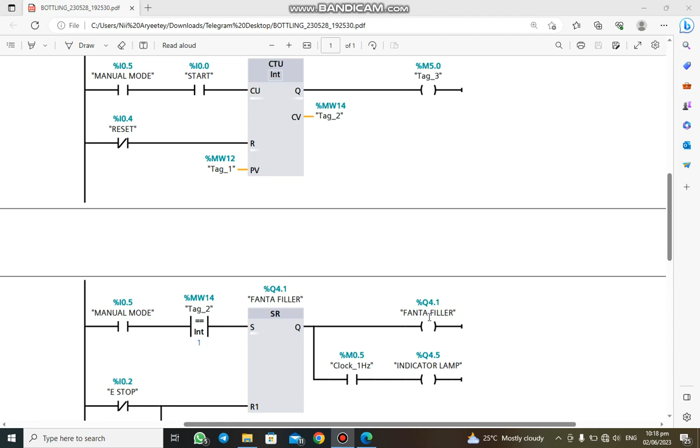So this statement is that when this current value here is 1, and then we compare it with this number, this value, which is 1, it sets our output to be high, which turns this filler on. So this filler will be filling the bottle with Fanta, and at the same time that it's filling the Fanta, this indicator lamp will be blinking.

Okay, also don't forget about this side. We have something here. Okay, so I don't know if you guys can see it very well. So something is happening right here. This manual mode again here is to help us know that we are in the manual mode. It's to make sure that we are in the manual mode.

So this MW14 is the same one here, and this number 1 is the same thing here. So basically what we're trying to achieve here is that whenever the start button is pressed, this MW is the current value of the counter. If the current value of the counter is 1, and we compare it with this number, which is also 1, that makes it true. The very moment that this one is set to high, which makes this Fanta filler start filling the bottle, at that very same time this statement here is true, which will also turn on this timer.

So this is an on delay timer. This side is the preset time, this side is the elapsed time, and this is the output of the timer. So while this one is being turned on, at that very same time this timer is being turned on, and this timer is counting for 5 seconds. And we've stored the output of this timer into the memory bit M5.1.

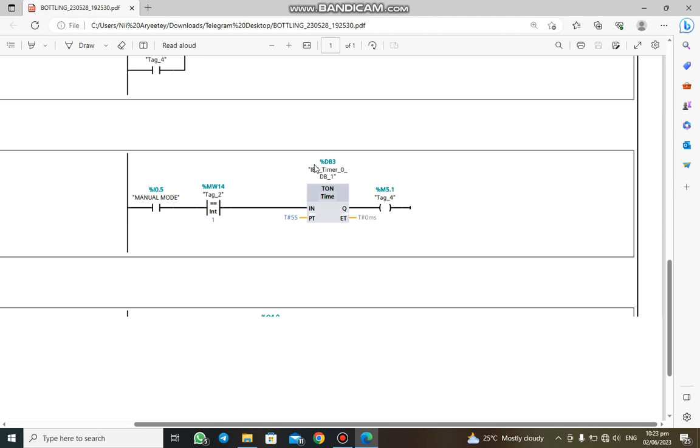Okay, so this is where the code got to. Yeah, so it's set for us to complete the code. So let me do a quick recap. Sorry, my machine is running a little bit slow.

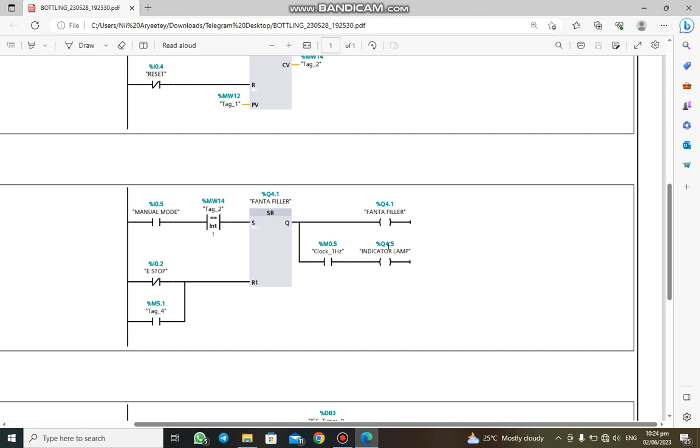Okay, so when we are in the manual mode here, we press the start button. This count value will change from 0 to 1, and when it changes from 0 to 1, this statement becomes true, which turns the Fanta filler on. Okay, at the same time too, this lamp will be blinking. Okay, so forget about this side. We come here, the manual mode is on.

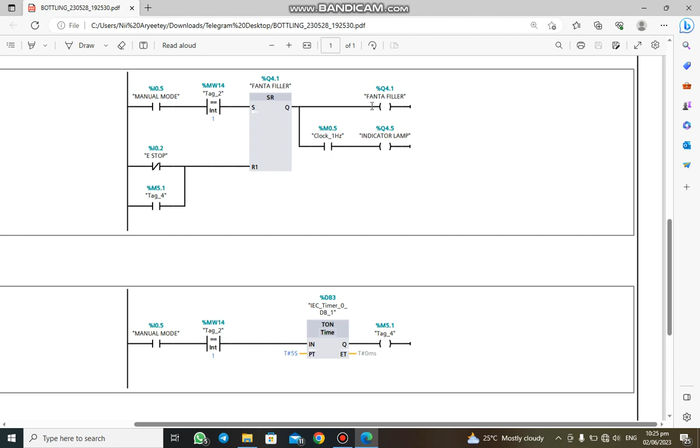This statement is true, which is same as this one. So while this Fanta filler is turned on and it's filling the bottle, at that very same time too, this output is high, which turns this timer on for 5 seconds. So after 5 seconds, this output becomes high, which we then use to reset the Fanta filler, which stops the output from filling the bottle.

Okay, so after stopping filling the bottle, we will want to press the button for the second time, which is this side. So we are in the manual mode again. The button is pressed for the second time, which then turns on the conveyor to make the conveyor start moving, which would in turn move the bottle to the second part. So then we want to stop the conveyor again. So we press the button for the third time, which is this side.

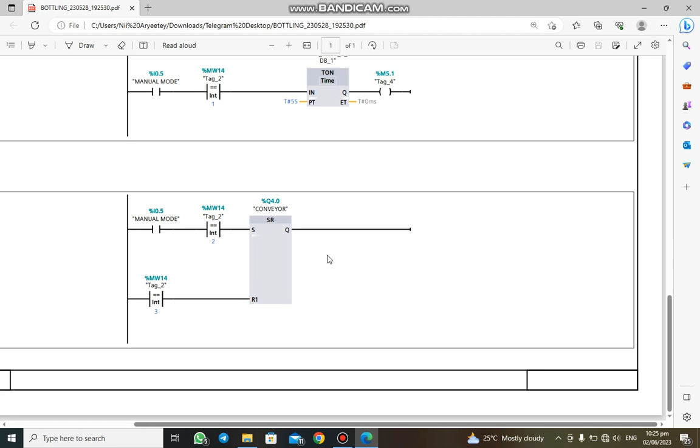So the current value will be 3, whereby we use it to compare with this value here, which is 3, which makes the statement true, and then it resets the conveyor. Okay, so I think that's it. I wanted to do a simulation with my machine, but my machine is very slow, so I can't do it.

But in case we are able to meet early on campus tomorrow, before Sir comes, I will try to use Joshua's machine to do the simulation, so we all get to understand it very well.